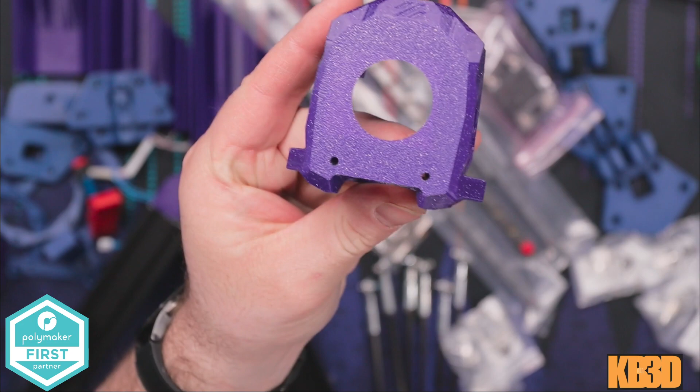So here is my tool head, which I should have done on a fancy plate, but that's okay. Here is the tool head. And how does the front fan work for this? Can someone explain that to me?

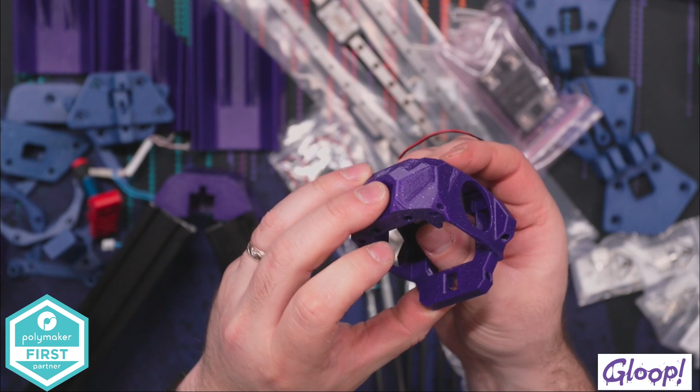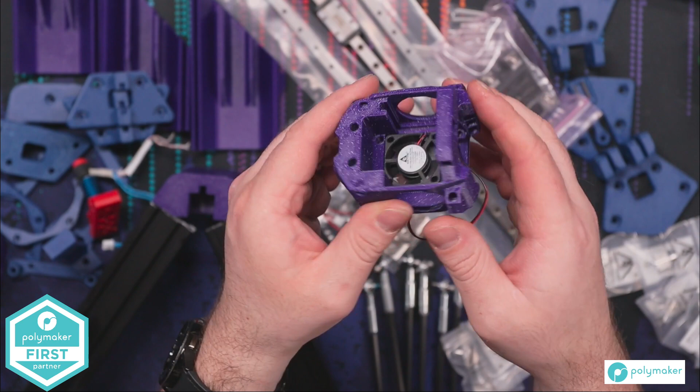I think it's this. But how does it work? So there's that, but how does it actually attach? Not a friction fit. Is it a friction fit? No, it's pretty loose. There is this right here, which I guess that kind of holds it in place.

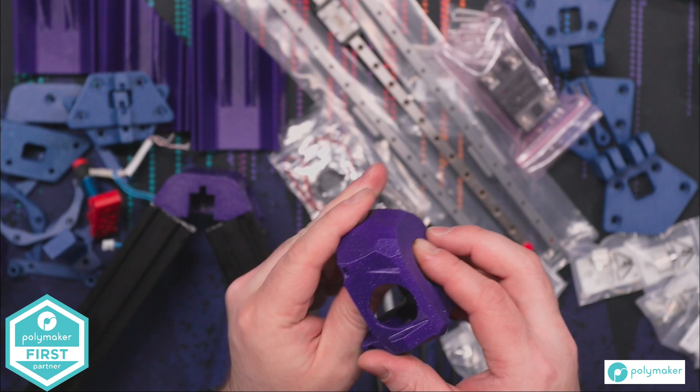So when you put the Revo or the adapter on, does that make it fit? Apparently it goes one way. There we go. No, it's still loose. Wait a minute. Fell out. Has anyone built a V0 before? How does this thing work? I've never built a regular tool head.

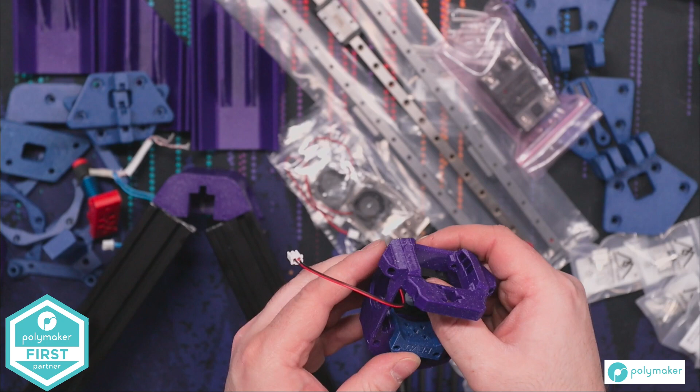When the blower goes in, it'll hold the cable down? I don't care about the blowers. Unless the blower acts as kind of a way to hold it. It's still loose. Oh, that was in Spanish. That's funny, yeah, it's still loose.

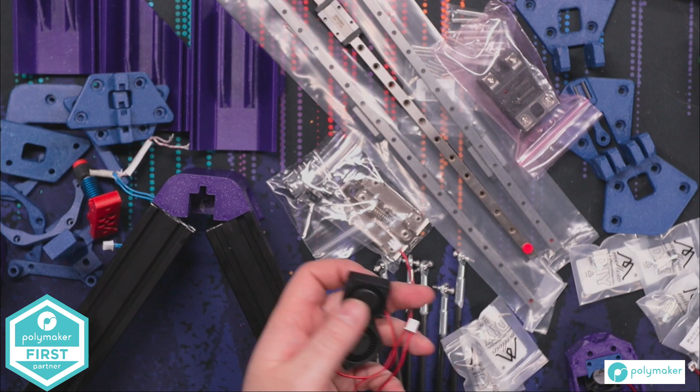Let's see. Starting to get some sense back. That's good. Wow, it takes these little mini fans, really. Oh, that's gross, I want Dragon Burner on this thing, like ASAP.

How does this work? Oh, I guess you have to fold the cable back. And then probably take this out of here. But I'm wondering if this holds it in? Like, I don't see a way to attach it unless I'm going crazy. There's nothing in the CAD, so I was figuring it's just a friction fit of some sort.

I'll say this gives me a major appreciation for Dragon Burner. Yeah, it's kind of held in, but it's like, it's gonna vibrate. It's like it almost needs a little bit of super glue. Huh. It's the carriage. Yeah, I can see that, but it's like, it's not a super tight fit. It's gonna wiggle, but I guess it's fine.

Unless I'm missing a part. It is what it is. Alright, I think we're covered. We can start something. We'll just go through the introduction to what this thing is, and then start assembling it.

How do I get this thing out of here? It's tight, it's very tight. And did I break the fan? What did I break? Oh yeah, I snapped one of the blades off. I snapped one of the things off.

Do you think this will work? Send it. What's the worst that can happen? Yeah, probably not a good idea to use it. I have more.

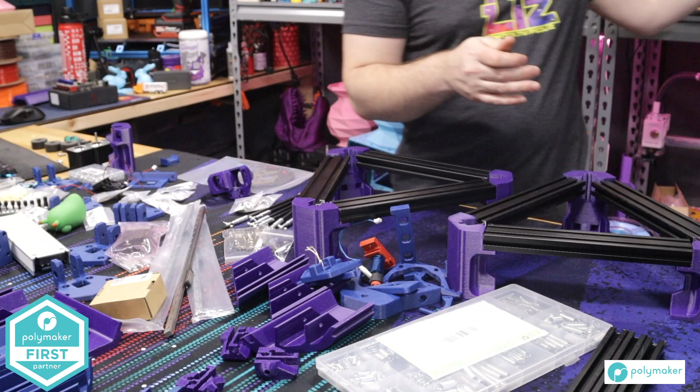Alright, let's not break this one. Those are the fans. These are some of the parts. It's very, very messy and sporadic. Let me kind of, is this camera shot in view? Yeah, but let me get some of the stuff out of the way. Springs, those I don't really need, put those over here.

Here is a random Revo that we're going to try to use. I think we're good, good enough. Alright, what do you guys think? Should we start? I think so.

Oh, I forgot about one of these things. I don't think we're actually gonna get to it today. Maybe we will, if I get the frame assembled.

Hold on, I wanted to swap out this one part first. So what happened is I accidentally screwed this in too much and it completely decimated the whole entire inside. You know, you keep screwing a screw in and it goes in infinitely. Yeah, that's what I did.

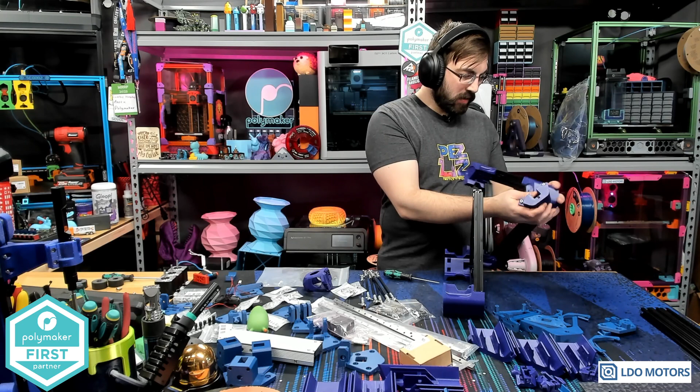Interesting, okay. They only have one screw size, and apparently it's for both sides, for the top and bottom pieces. I'll have to keep that in mind. Kind of want to get some of the hardware out of the way too, but that's okay.

It's always messy when you build a Voron. It starts off clean and then everything goes everywhere. So this is kind of like building a Voron, sort of, not a Voron. What should my clickbait title be for this? I gotta have one for YouTube. What should it be? This is not a Voron Delta. I kind of like that.

That's the one side, these are the bottoms. I gotta finish, maybe I'll clean up these a little bit more before we go. You like that too? Because people really want a Voron Delta, and this is clearly not a Voron Delta, but it looks like one. So it's of course a little bit clickbait, but it'll also be a fun watch anyway.

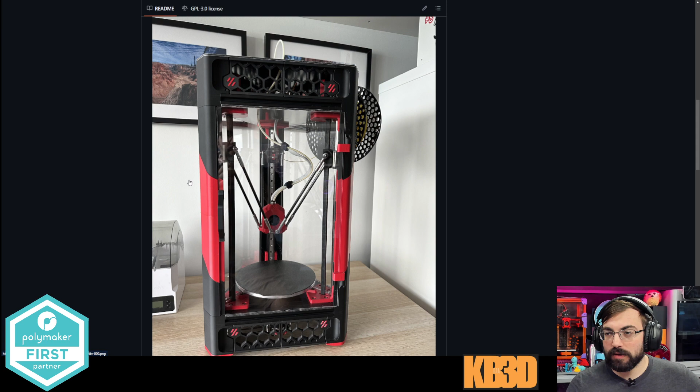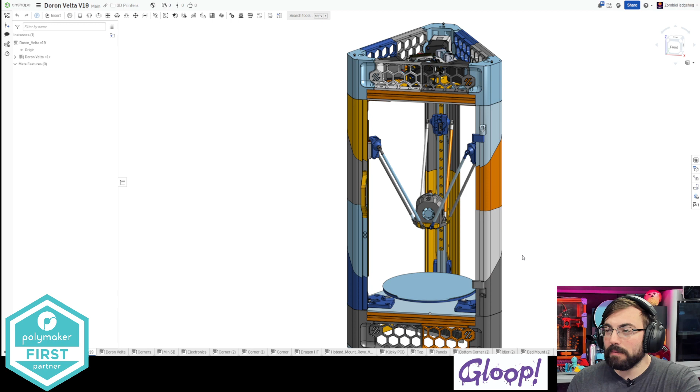And this was kind of an April Fool's joke at first. They were gonna make a regular off-the-shelf Delta look all Voron-y with the skirts, but then they said, you know what, let's make this a real printer. So starting from scratch, they designed pretty much everything. This is an awesome little design. I'm not expecting super high performance, but it's gonna be a fun build - a cute little, well, not really little, but a printer to have around.

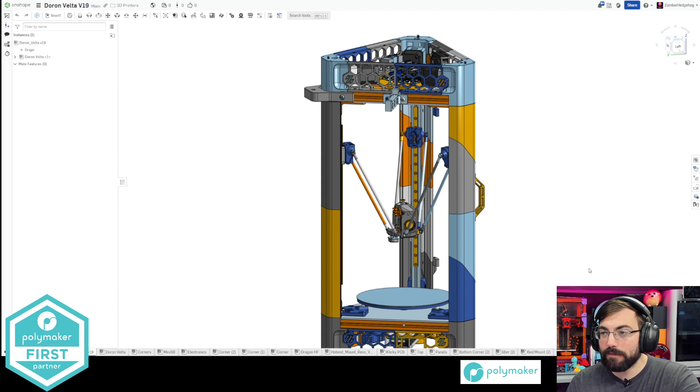The total build volume, I'm not quite sure because it's a Delta. It's very strange, but this is a 200mm bed. We should be able to get most of that - if we put panels on it, maybe slightly less. It fully supports panels right off the bat. It has a mini stealthburner-esque tool head, and it supports a manual Klicky probe.

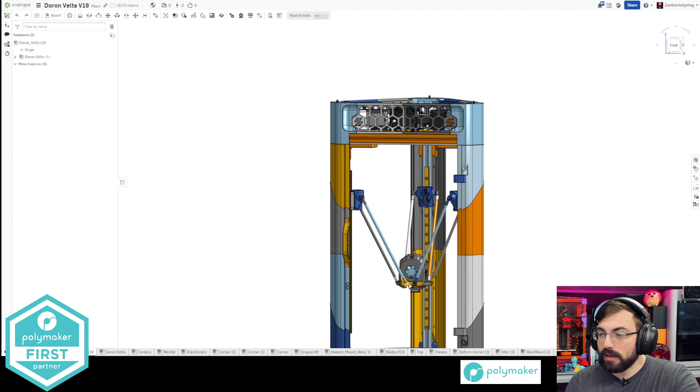It's bowden, so there's an extruder that goes over here, just like a regular Delta printer - it'll be bowden, and you can make it look like whatever you want. So at the top here, we have our control board. I'll be using a Big Tree Tech Manta M5P with the new CB2. So thank you to Big Tree Tech for sending that over. I will be very much looking forward to trying out the CB2.

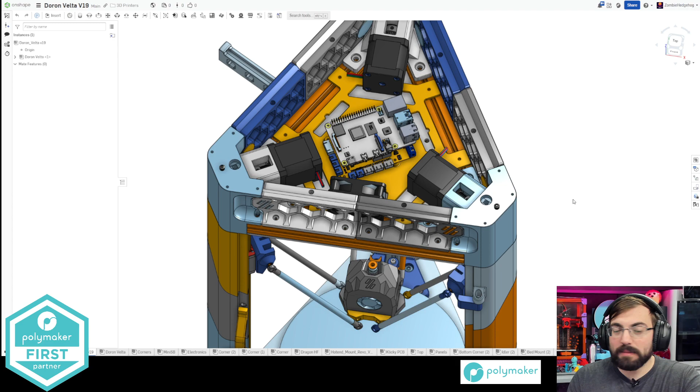We're gonna be using some LDO Speedy Power motors. I have 3 of those here - thank you to LDO for those. They'll be reasonably fast. These are direct drive, so we're feeding directly off of the motor. That'll be interesting to see what kind of speeds we can get, but rigidity is a question.

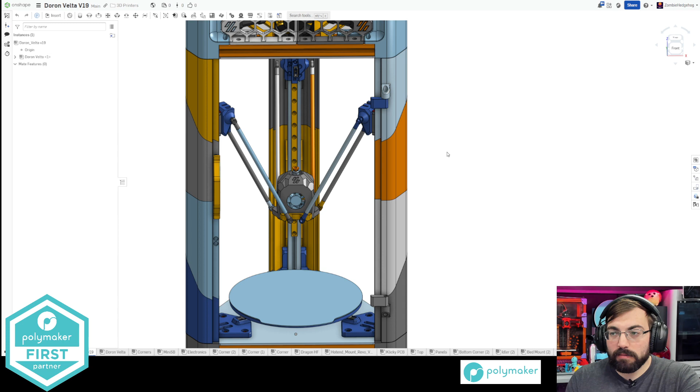This does have a 2020 based frame, but I don't know, we're gonna have to build this and see how well it works. The bed is kinematic - there's a ball bearing on these little metal dowels, and the whole thing is held in with a long spring to hold it down. The bed itself, we are using a Doron Velta bed from Mandala Rose Works. I did purchase this for this project, and I did get the version with magnets. So I'll show you guys all these parts, and we're gonna try to start assembling the frame.

So out front here is most of the parts. I have some skirt pieces in this bag over here.

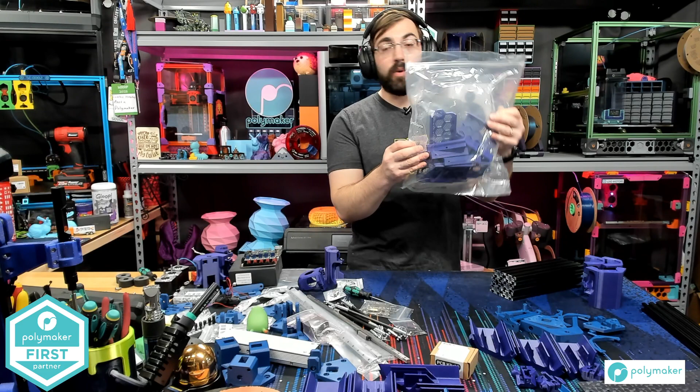A really good tip when you're using Polymaker filament: they give you this nice resealable bag, keep the bags. They're very useful to store parts of printers in, organize stuff. They're just very useful to have.

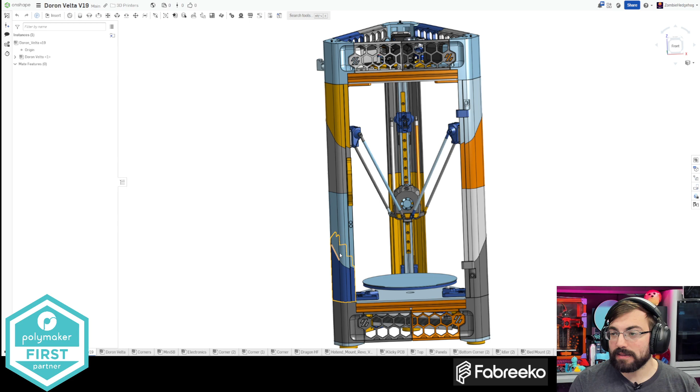So what I did was I exported every piece manually, just a right-click export, and I printed each one of them. I did have to scale up the parts. This is very important: in order to print ABS parts and have them fit as expected, you need to scale them up. I'll leave that to the guides on how to do that, but just make sure to scale them up to allow for ABS shrinkage.

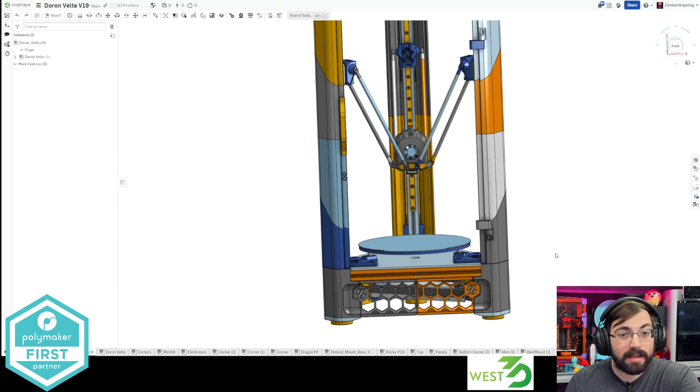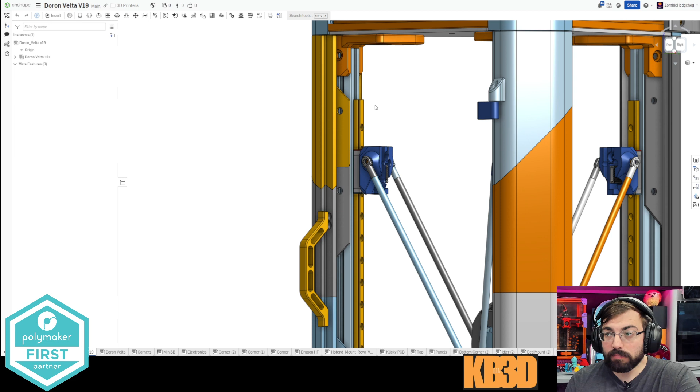One also very important thing, which won't really affect the build: I increased the height of this by 50 millimeters. So these parts right here, the extrusions and the linear rails, you can kind of see it here, I increased everything by 50 millimeters. Why? Just so I can get some extra Z height. I'm not expecting crazy high performance anyway. If I wanted more performance, I'd want to shrink it, but I increased the height just to get a little bit more usability out of the printer.

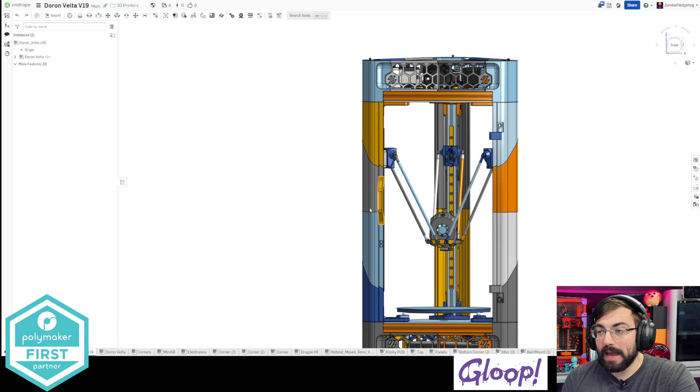I'll be interested to see what our final build volume will be. So I ordered extra long rails from West 3D for this, and I cut the extrusions longer, and then I did a quick extrusion, I increased the size of these printed parts in the middle here. So that's the only difference between this build and what you might build.

So let's get started. We'll probably start with the bottom here.

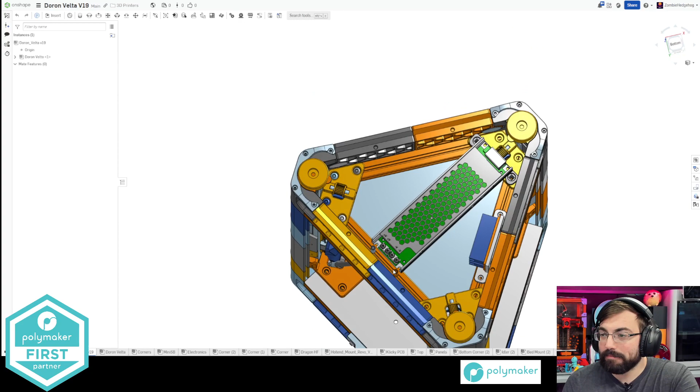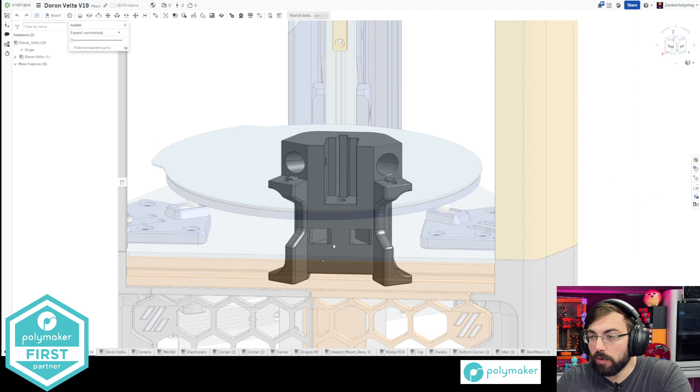So if you're working in CAD, what I like to do is isolate parts. So here is a foot, and I want to see how it attaches, so I'm going to isolate it. Now the whole entire printer is transparent. You can still see most of the components, but you can see how stuff works, how it attaches, etc. You kind of have to have an understanding on how stuff generally goes together.

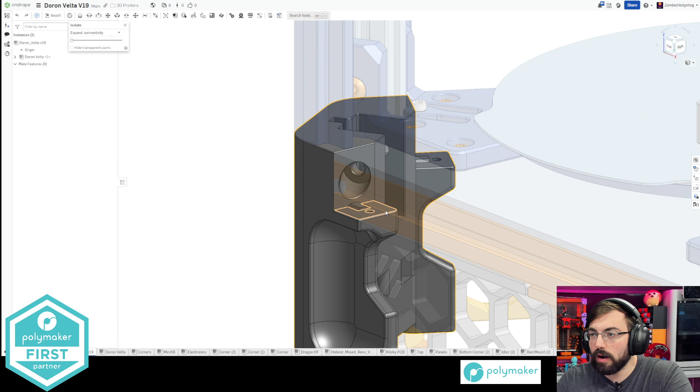So I can see here we have slots for the 2040 extrusion that's kind of hiding here. But first, we will need to install our 2020 extrusion. We have some pass-through holes here that go through, so the 2020 extrusion will get mounted with, well not a blind, just a screw that goes into the tapped bottom of the extrusion. And I did forget about these, so I'm glad I checked.

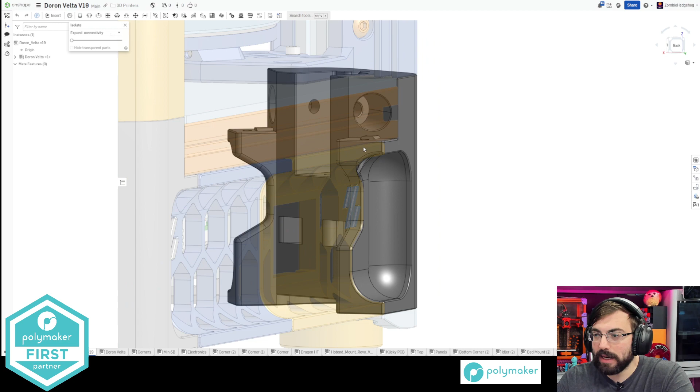I'll have to find some M3 hardware. Actually, that's M5, isn't it? Ooh, I'll have to find that. Yeah, let me grab that. So we need M5, probably 10 or so, maybe 12. I don't have that handy.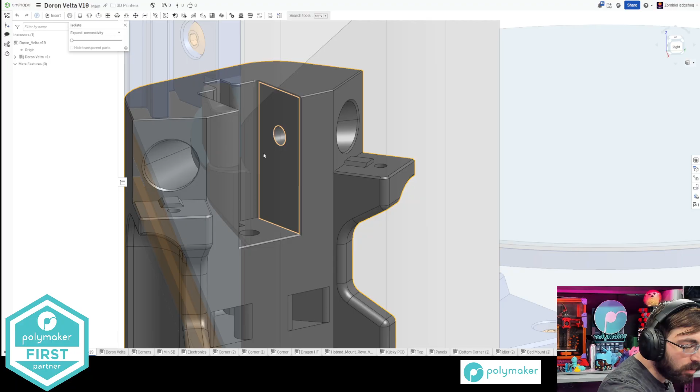So one of the downsides is that this whole thing is self-sourced. Right now there is no kit. I don't know if there will be a kit for this, but I did follow the BOM and I bought components. So we have some rods for the arms.

I got some mellow bearings, a power supply, and some various things, like the Klicky PCB.

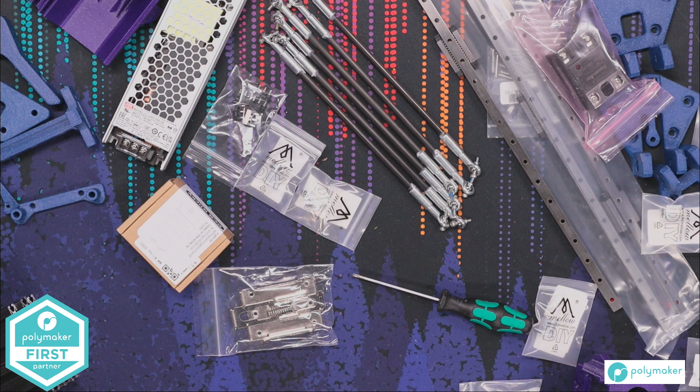A lot of this build right now is BOM based. If you have a Delta already and want to convert it, make sure the parts you have actually match up. There's a possibility that if you want to use a Delta but the arms aren't quite right, or one of the parts just isn't quite right, close but not perfect, you'll have to do some extensive modification of the CAD to make it work. Currently this is the only one, there is no remix. This is a brand new printer, so there's not really a remix for different size components.

Trying to find some more hammerhead nuts or anything. I've built a lot of bulldogs in the past, so I generally collect random bits and pieces. I should be able to find something.

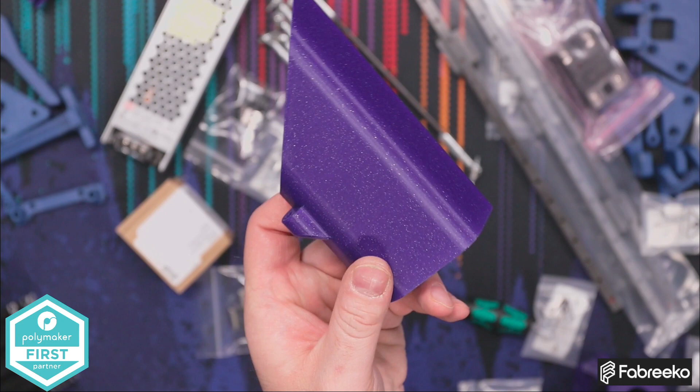Other notable things for this build: I did print everything in ABS, or actually ASA. I used Polymaker's Galaxy Blue ASA for the blue parts, and Ambrosia from West 3D Midnight Meteorite. It's a very nice blue and complements the other blue quite well.

I knew this would happen. I was gonna have everything ready to go, and then I would not have the piece for literally the first thing that I needed. Always happens, right? We get an F in chat.

Now I'm trying to go through my various printer builds. I don't know how many Cerials there are up to this date, but I know of pretty much two. There's two Cerial videos on YouTube at the time of this recording: Double T's and Roger's. Double T, I don't know if he did some of the CAD, all of the CAD, or most of the CAD, but he did some contribution to this project, quite a bit of work probably. So thank you to Double T for that.

Here are some fasteners, let's see. Trying to find some hammerhead nuts. I'd rather have roll-in nuts for these, just because of the location. But I can use... will I be able to use hammerhead nuts? I'm not sure. You'll probably want to get some M5 roll-in nuts for that specific part.

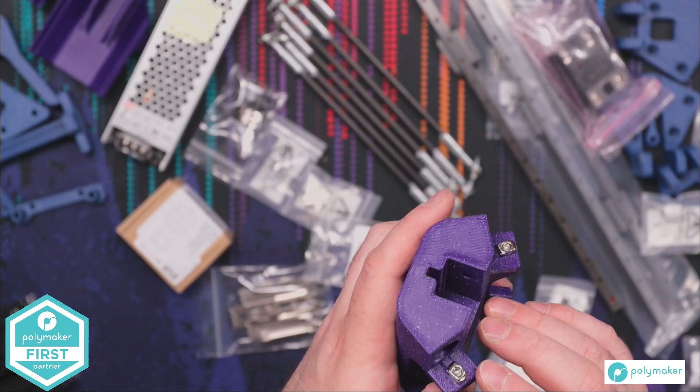So here are some hammerhead M5s, these are the rolling kind. Generally how I use these is I'll attach it to the screw and then slide the part through, that's the easiest way to do that. But on these pieces here, I'm actually gonna have to access inside of here, so it's not gonna be as easy. Actually, you know what? No, it will be fine. We'll be fine.

Let me actually set up this other camera and get a nice zoomed in view of that, if I can. Trying to do some more, or capture more of what I'm building as I'm doing it, because I'm a pretty visual learner, and sometimes just seeing something done a certain way really helps out.

So what we're gonna do here is move aside all of these very organized pieces, grab some of these and figure out what length we need for M5s. I have some M5 by 10s, we'll see if that is enough. Is this a 3mm driver? Most likely. All right, so let's see if this works. Yes, this is perfect, so we have our M5 by 10, and it sticks out that much.

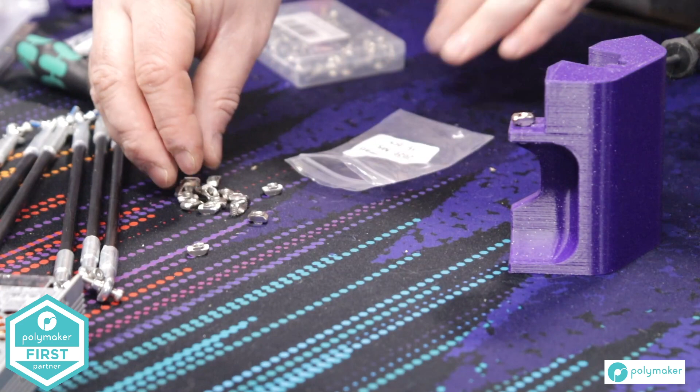So what we're gonna do is keep this in and grab one of the hammerhead nuts. A Steve Builds hex tray would come in very handy right now, but alas, I have not printed one for this project. What we're going to do is kind of just hold this in place and screw it in a little bit, just a little bit.

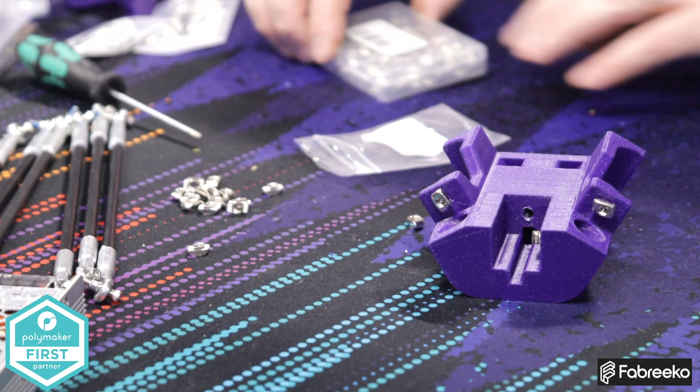Trying to show what I'm doing here. So just screw it in a little. There we go, that's it. So it's held in place, and we'll be able to slide on the extrusion. I'll grab another one of these and do the same thing.

So before you start this project, check the BOM and check the quantities of various fasteners. Because I had to purchase a lot of M5 by 10s, I was completely out, and a lot of M3 by 8s for the rails. So keep those in mind as you do this build.

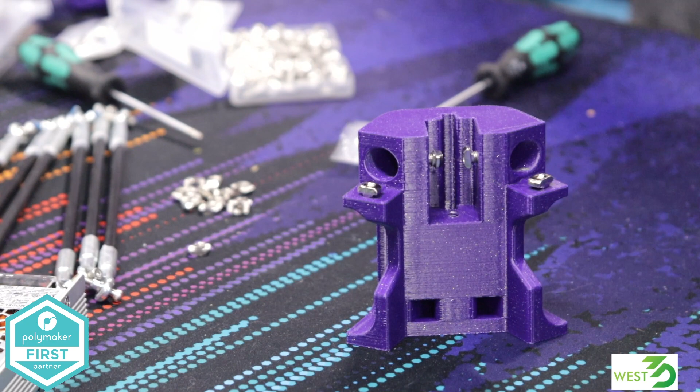All right, so this is the point where we're at right here. Next, I'm gonna take my vertical extrusion, these are 2020s, and I'm gonna slide this through. This is gonna be a reasonably tight fit, as this printed part is, well, it can be tight. I've already done it a couple times. But that goes in like that, but you're not done.

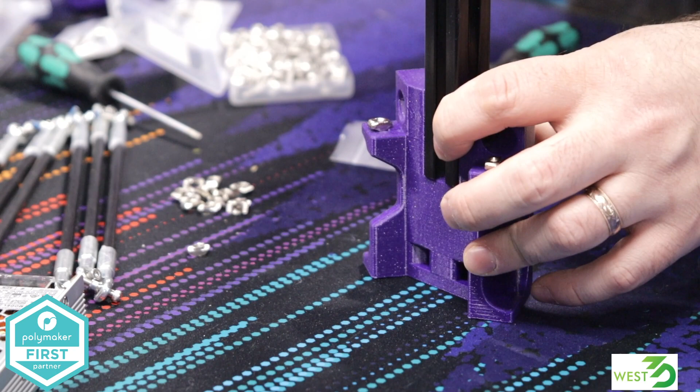What you'll want to do is, if you've never used the hammerhead nut, you can practice on it, but you kind of have to back it out a little. So screw it backwards and then screw it forwards. And you can kind of feel if it's in or not.

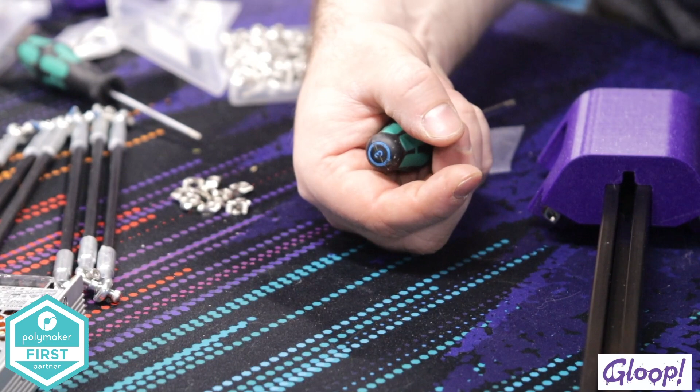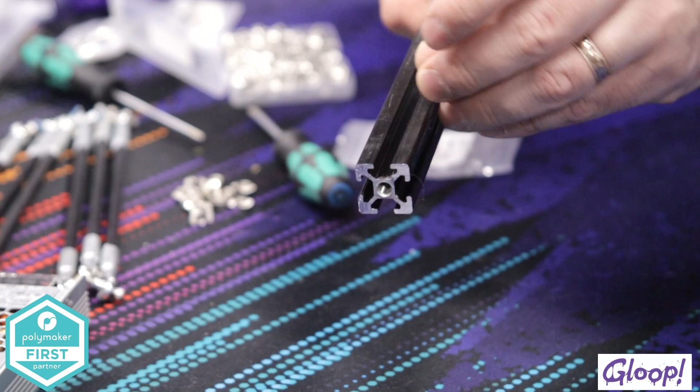And I can look for the side, and yes, we are in fact in. I don't know if I can show that on camera, but you can see that the nut is sideways here. So the nut looks like this, sideways in the profile instead of the other way. If it's like that, then it's just gonna slide right out, it's not gonna actually grab on anything. But when it's sideways like that, it is catching it and it's actually grabbing onto it. So that's the idea, you'll kind of have to feel and see.

That's why I like to screw it out a couple times and then screw it in. If it immediately grabs and it gets tight, then you know you have it in well. But if you have to keep screwing it and screwing it, it's probably not attached. So that's step one, is to get this piece set up. I did pre-assemble this whole thing to make sure it fits well, so that's why these fasteners are in here.

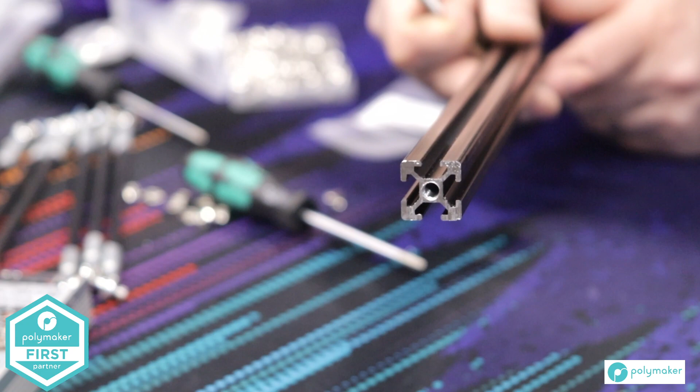The next thing I'll have to do is grab my very long... what is this, M5 by 60. And in my case, these are actually M6. So these are Zaltech extrusions, and depending on what extrusions you get, the tap or the drilled hole on the bottom here will either support an M5 tap or an M6 tap. In my case, with the Zaltech extrusions, it takes an M6, which should be stronger, but keep that in mind. So check your extrusion before you start. I think Misumi and standard Voron frames are M5.

Oh, is there a heat set on here? No, it just screws into plastic. Okay.

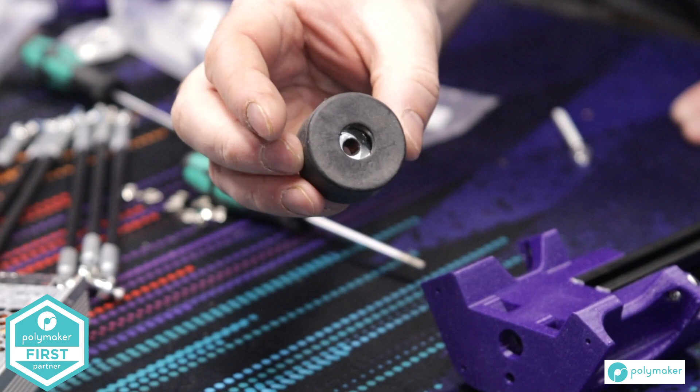So the next part is the feet. I think these are called amplifier feet. You can get these from various resellers on Amazon, etc., pretty much everywhere. These will actually be part of the structural part of the frame because the screw goes in here. It goes through this entire long channel, and then...

Wait a minute, is that right? Oh, maybe not, hold on. Hold, I have the wrong part. These are the bottom ones. The bottom ones have the screw hole. So this is actually the top. I'll have to repeat the process. I meant to only do the bottoms at first. So the top has a little recess right here, and the bottom has a spot for the feet.

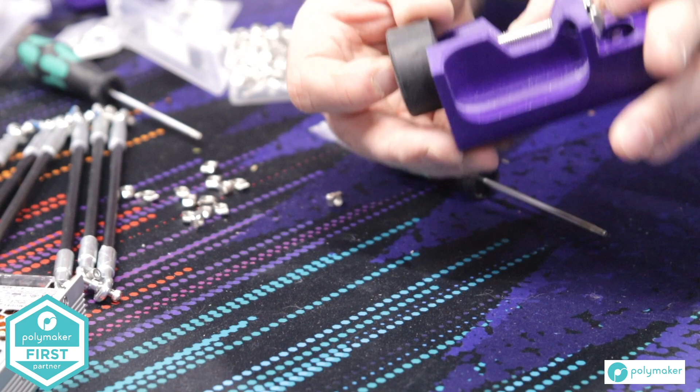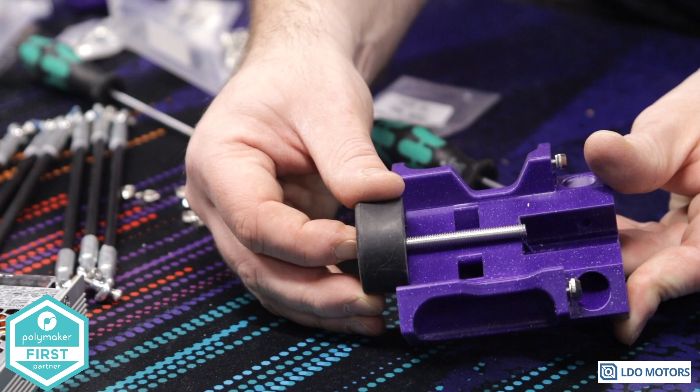So I'm just going to undo this little hammerhead nut and then redo that with the bottom part. But I just want to verify before I go too much further that this bolt in here is going to fit. And it looks like it is not. That's not very... there's not very many threads there. It'll probably work, but it's going to be very tight.

So that's really going to compress this foot, if that even grabs. I'll be very curious. So this is using that 60 millimeter. So maybe, oh boy, that would mess up a lot of the CAD. Maybe not, maybe just recess this part more forward into it. I'll message the designer on that.

But let's get this part reassembled, if I can find which one I had.

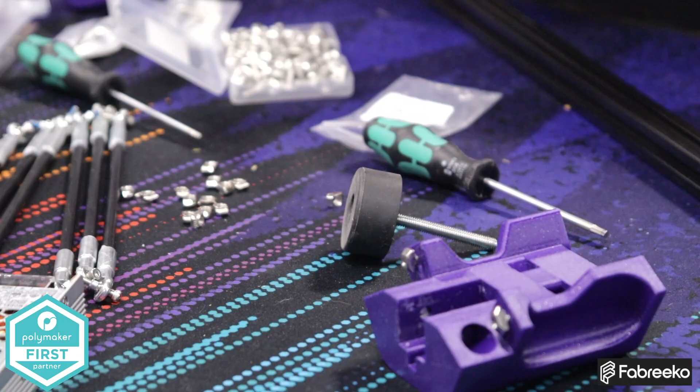Building a printer from CAD is not the most easy. Building a printer from CAD while on stream is even less easy. Probably not structural, just to hold the feet. It is actually very structural, because it's tapped into the bottom of the extrusion, and that's what holds the extrusion kind of straight.

You built your crucible using only CAD, definitely slows the process down. Yeah, making a manual is not simple.

You know, you might think it is. Oh, just make a manual. No, it's not easy, because you got to go through every single step. You got to orient stuff. You got to show the correct things. It's very difficult. So you should be very appreciative to everyone who has made a manual for a build.

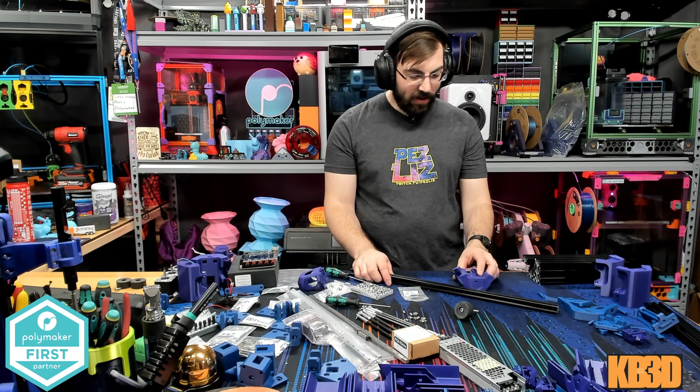I know it's a lot of work. But for a project like this, I'm not expecting a ton of people to build this thing. Probably just not going to happen, right? It's kind of a niche build, but if you're going to do it, I think you're probably going to do it because you want to do it. And if you want to do it, you're probably going to want to learn how to read CAD. Or maybe, I don't know, maybe there'll be a manual. Who knows?

With Voron, it feels like the manual takes the most time. Yes, absolutely. Voron is not a company. It's not even a printer. It's a little cheeky, but it's a mindset, right? Voron is a mindset and mentality that you can build a printer fully supported with a guide. And that is very critical, is the guide part.

So let's see if we can get this thing assembled. I'm just going to screw in this bottom right here, and I'm going to use my little Dremel electric screwdriver. And I need a bit for it. Let's see, where did those go? Around here somewhere. This takes an M, or a 6 millimeter. Where the heck did that go? Oh, right here, literally right here.

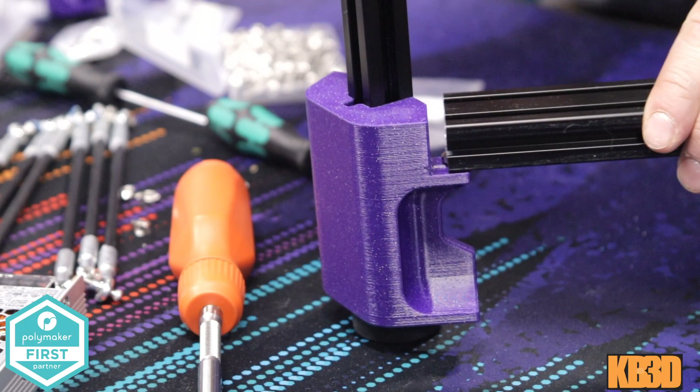I'm going to repeat this process, and you have to do this first because once you get these extrusions in next, it's going to block. I'll go back to here. The next part is these extrusions, and that's going to block that hole. So you have to do this step first for all 3. So there's one, pretty quick, all things considered.

Let's do the rest. So we're going to grab our part here, our foot. I want to insert these M5 by 10s. Screw in this hammerhead a little bit. It'll be a little tricky to work on this. Slightly longer bolts to the feet, or recess the feet. I'm thinking recessed feet would probably be the easiest thing.